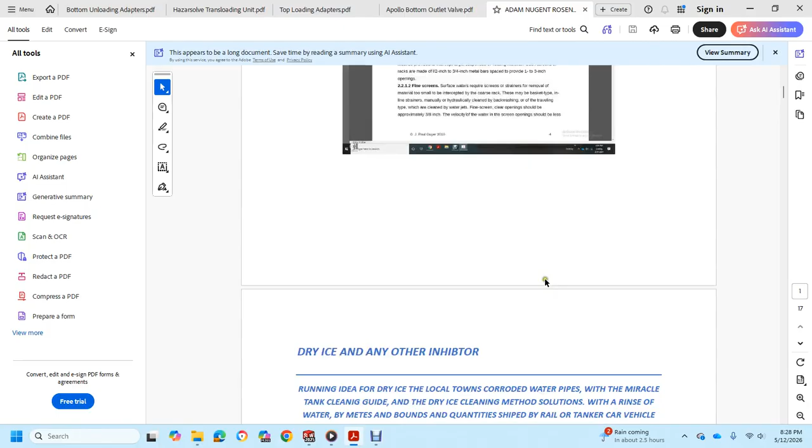Adam Nugent Rosenberger, October 21st, 2025.

Miracle Tank Cleaning Methods Information Repository for Advanced Tanker Cleaning Guide Cargo Handbook. It has an intro to water treatment PDF, dry ice and other inhibitors, running idea, water pipes, a miracle tank cleaning guide, dryers, cleaning method solutions with a rinse, rail and tanker car vehicle drinking problems, recovering sludge and product, solutions for a damaged pipe with watching customer, backflow meter housing, providing assistance with drinking water in town, allotting, and strategy, safety and health, and human integration system. Thank you, Adam Nugent Rosenberger, in the city of Dublin, United States.

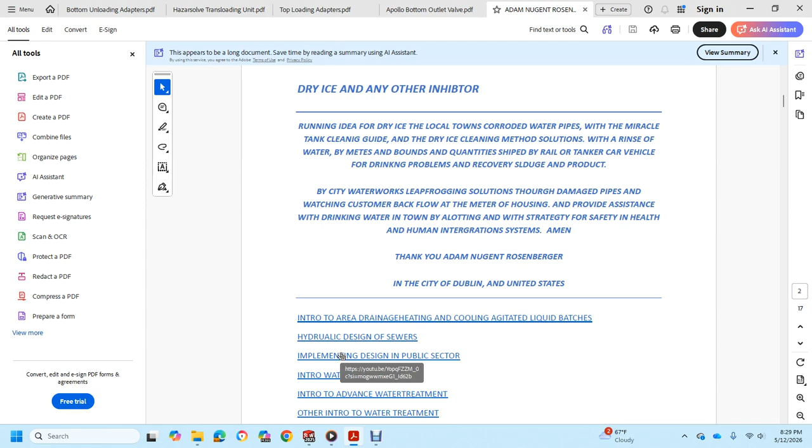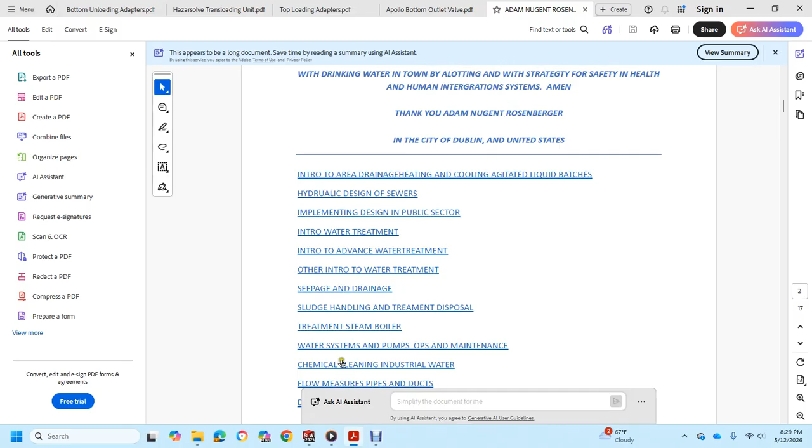We have several different resources - this is a suite that I made - covering area drainage, heating, cooling, agitated liquid batches, YouTube videos on hydraulic design of sewers, implementation design for the public sector, intro to water treatment, advanced water treatment, seepage and drainage, sludge handling treatment, treatment disposal, steam boilers, water system pipe operations, maintenance, chemical cleaning, industrial water flow, measuring pipes and ducts, and Department of Energy valves.

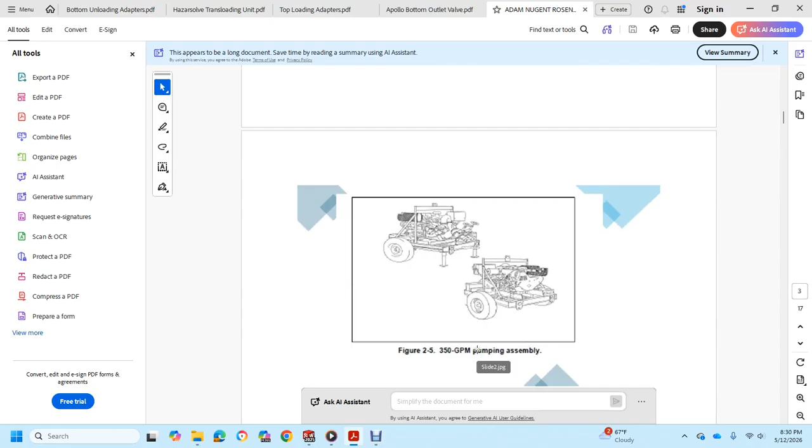We have a 350-GPM pumping assembly, a tanker car, and safety data sheets by Airgas USA, LLC.

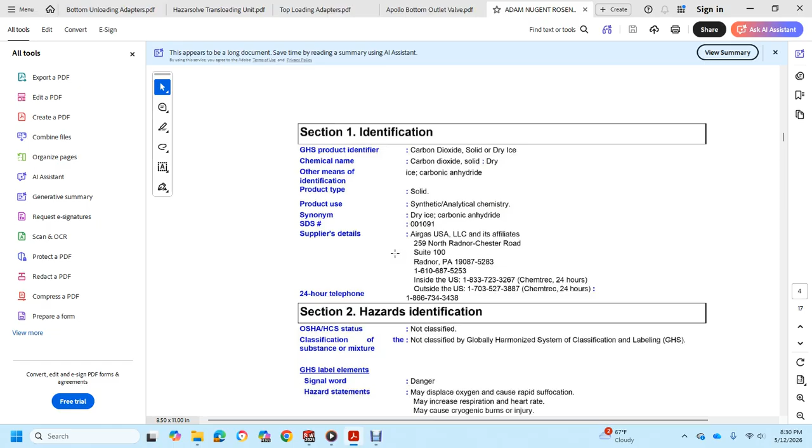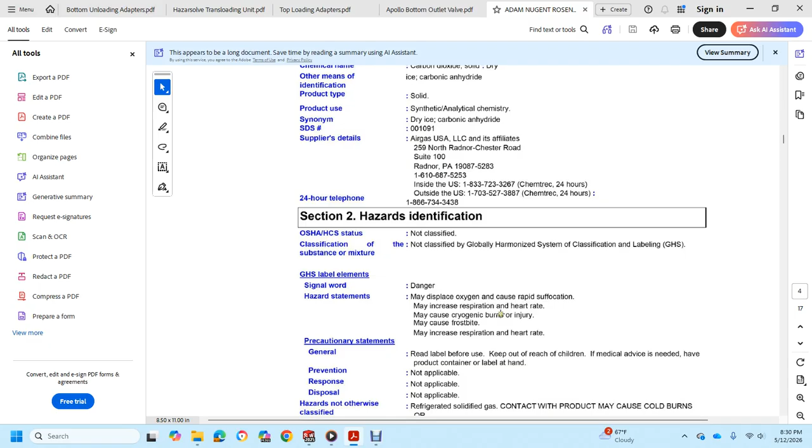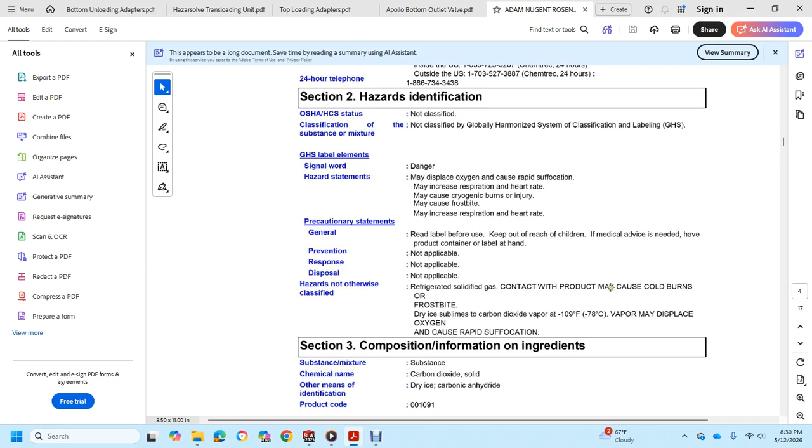We'll go into identification - carbon dioxide, solid dry ice, chemical name, GHS identification, product name, OSHA classification, globally harmonized signal word 'danger' - it may displace oxygen, cause rapid suffocation, increase respiration, heart rate, cryogenic burns, injury, and frostbite. Precaution statements for labeling: the refrigerated solid gas product may cause cold burns or frostbite. Composition is in section 3.

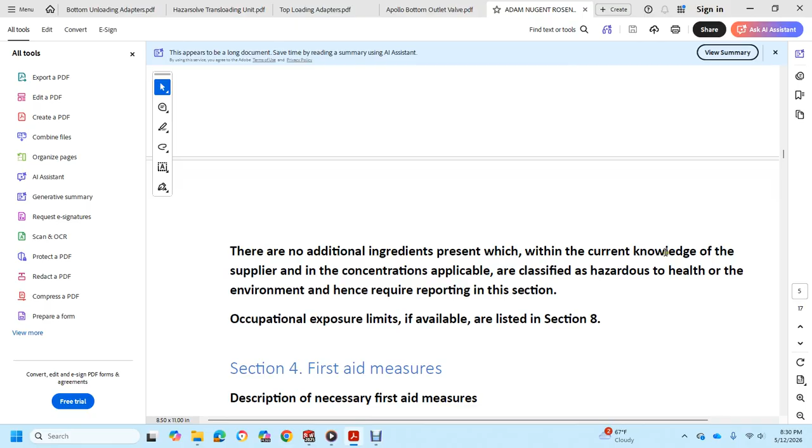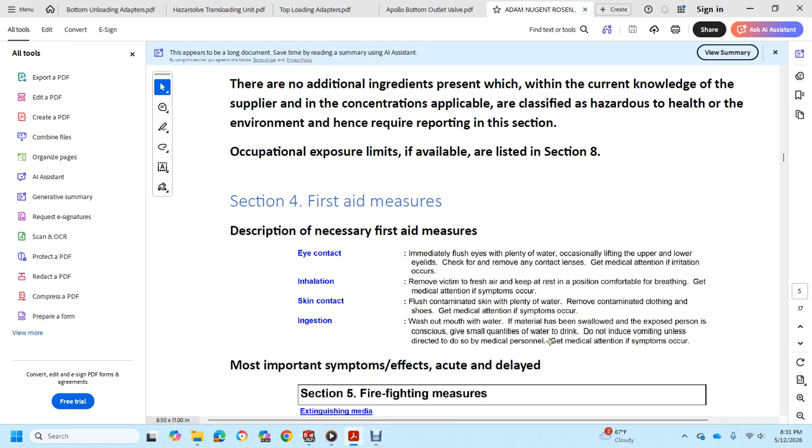The Miracle Tank Cleaning Guide lists ingredients presented with current supplier knowledge, applicable hazards, health and environmental information, and first aid measures. For ingestion: wash out mouth with water if the exposed person is conscious, have them drink quantities of water, do not induce vomiting, and seek medical direction - this covers firefighting as well.

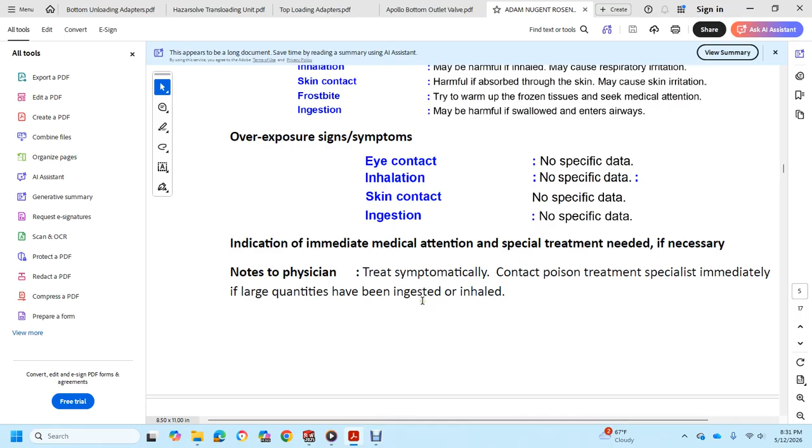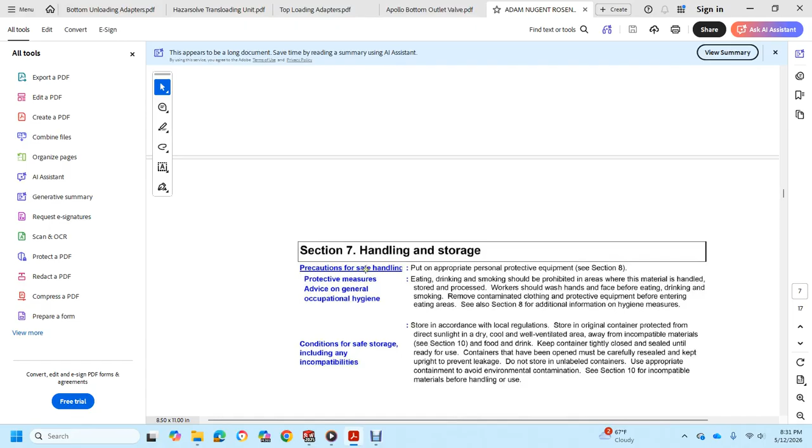There are some health warnings here, but dry ice is being used to clean metals. This covers medical attention, firefighting measures, precautions, cleanup methods for small and large spills, environmental precautions, safe handling, protection, and occupational hygiene.

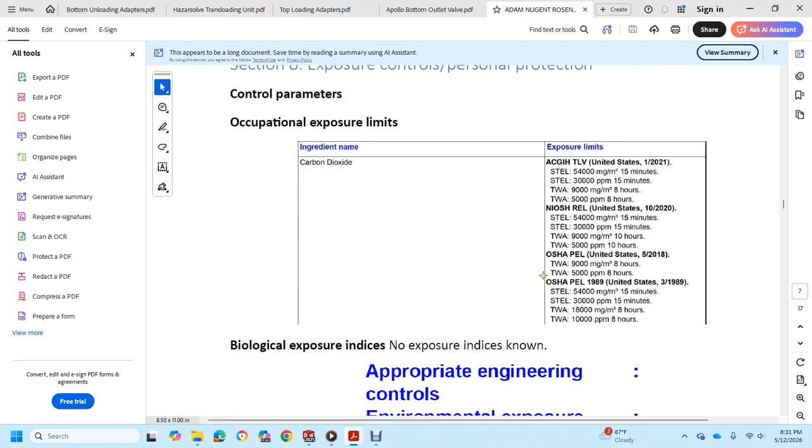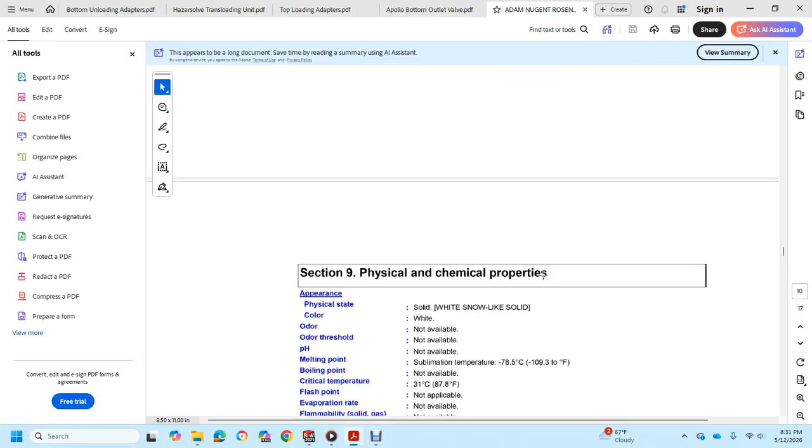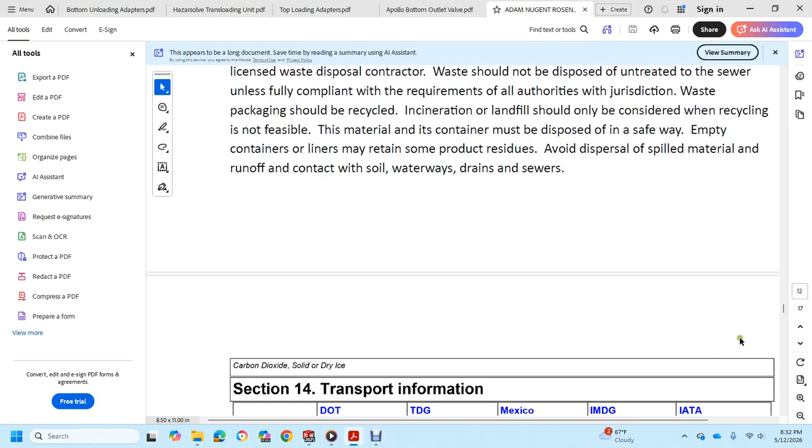Going through the Miracle Tank Cleaning guide's exposure control for personal - OSHA carbon dioxide ingredient names, emissions, respiratory protection, washing contaminated clothing before reusing, physical and chemical properties, stability, reactivity, toxicology information, and then transportation information. We have UN 1845 as the UN number, proper name carbon dioxide, transport hazard class, packing material, and environmental hazards.

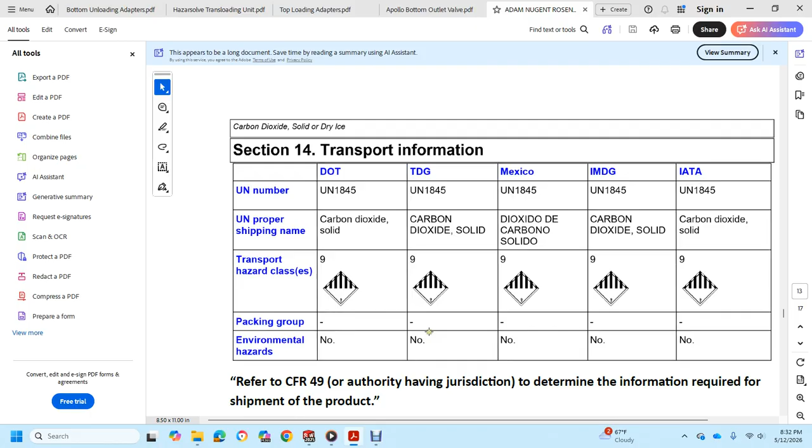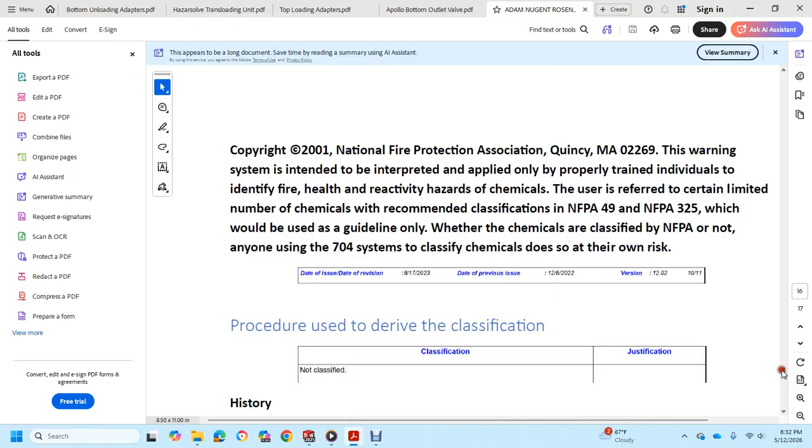Regulatory information - alright, so here's the deal, it shows different things. That's the Miracle Tank Cleaning Guide.

This brings up - okay, that's not that. Anyways, those are YouTube videos, and we'll take a look.

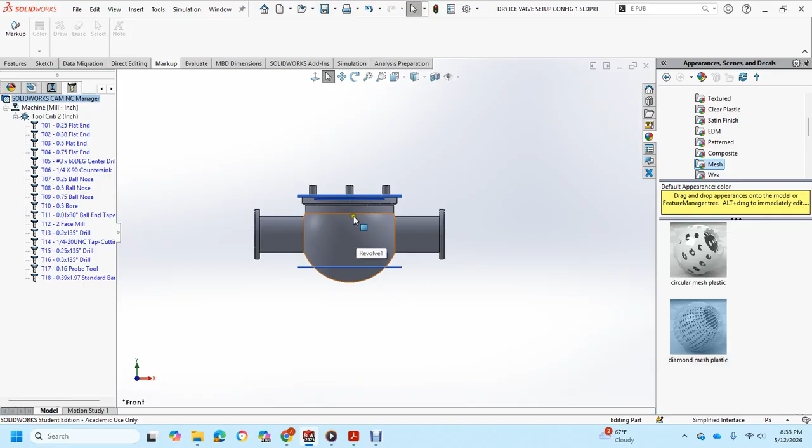Alright, we have SolidWorks. We basically have - on top we'll have a mega lug, and then we'll look at the drain. So here is an adapter.

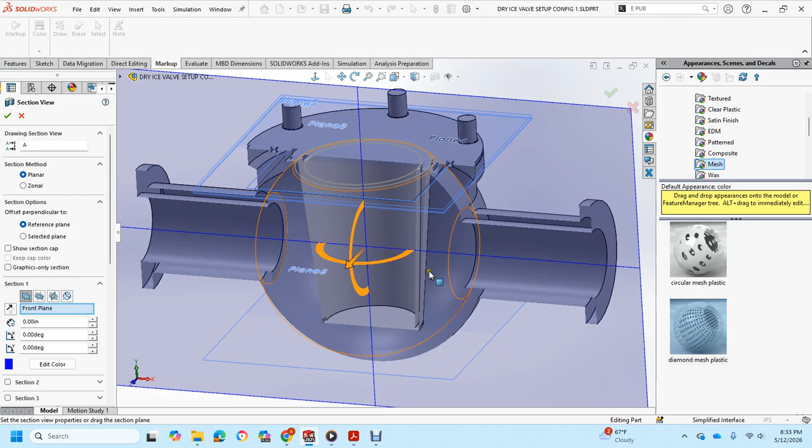In the middle there's a cone in front of the filter element, and that's porous, like over here in the circular mesh plastic. And then it rises from the top.

It starts at the bottom, goes to the top, comes around the top, and meets the lock - a nice little lock right there.

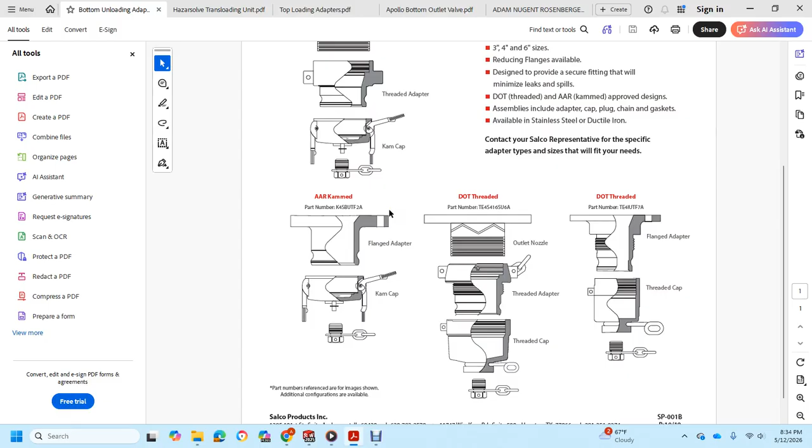The bolts are unthreaded. From here we take - let's go to the bottom outlet adapters. We add an adapter to the lid, and these are for tank cars.

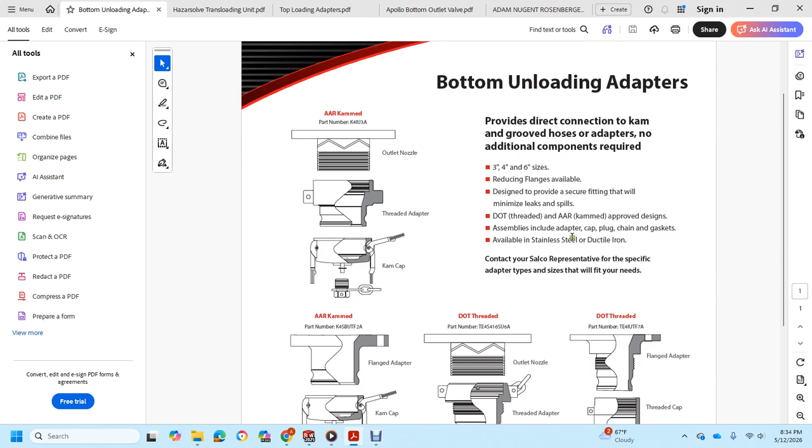We have the AAR Kammed part number K bottom unloading adapters, in 3, 4, and 6 inch, with reducing flange available. Designed for product security and fit, to minimize leaks, with DOT thread approval design, assembly including cap, plug and chain, and gasket available in stainless steel and ductile iron.

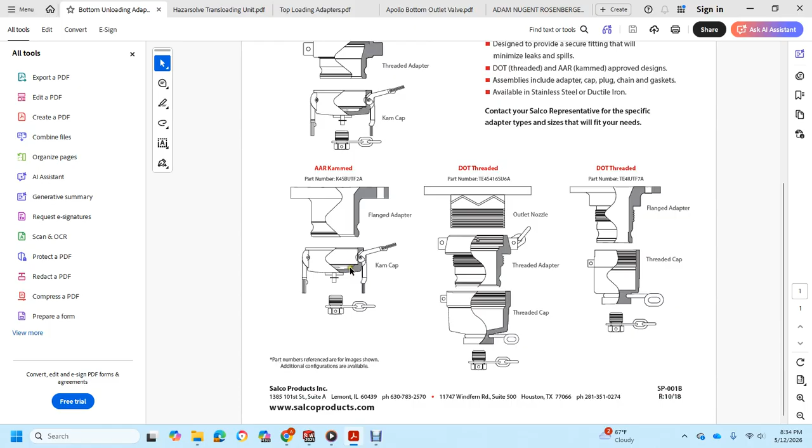So what we do is have a hole in the top of the mega lug plate on the filter, and then we add the threaded bottom unloading adapter.

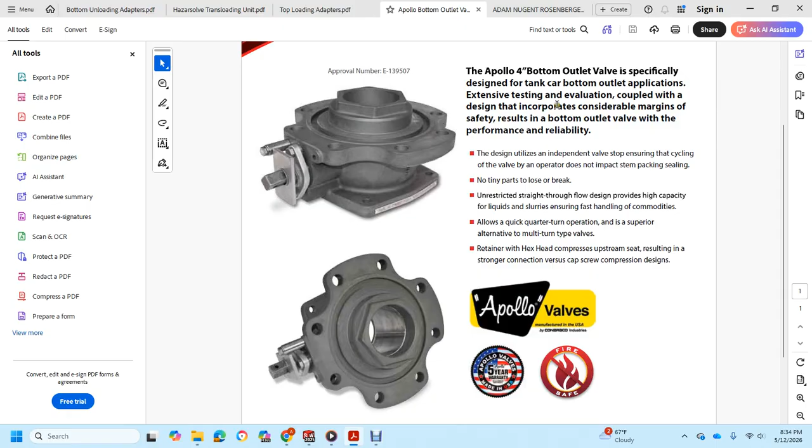We have the top loading adapter, and this one is a bottom outlet specification for tank bottom outlet cars. Here's another bottom outlet, and a top loading adapter.

Looking at the bottom outlet adapters, it would go right here in this circle. The bottom outlet adapter would plug right into the grid iron.

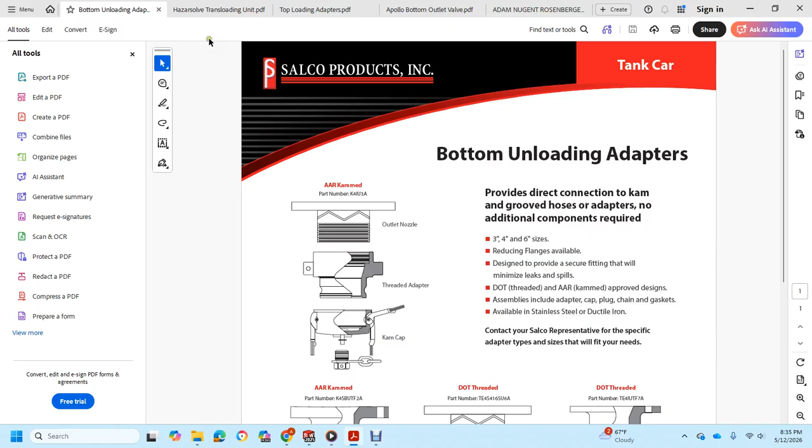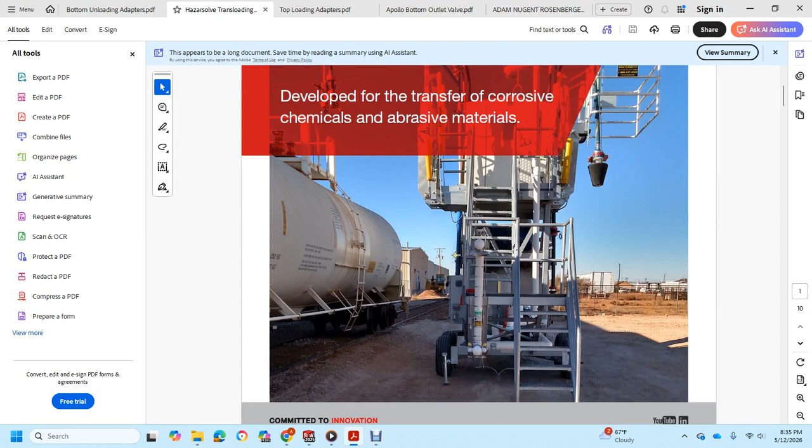We have a Hazarsolve transloading unit - these are Salco products. As we can see, it's wheel operated, developed to transfer corrosive chemical and abrasive materials. Overview of Hazarsolve - it's a trailer.

It has a transfer system with shutoff valves. An actuator protects against acid spill, product pump line suction, and an inlet basket strainer. So we looked at the pipe with a basket strainer, protecting the pump for debris and solids in the product.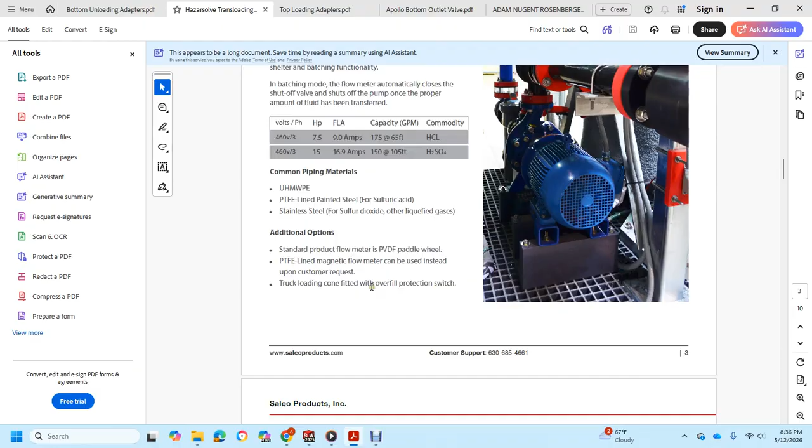We'd be using dry ice as the main chemical. Here would be the structure for shelter, showing the trailer with hoses off the side.

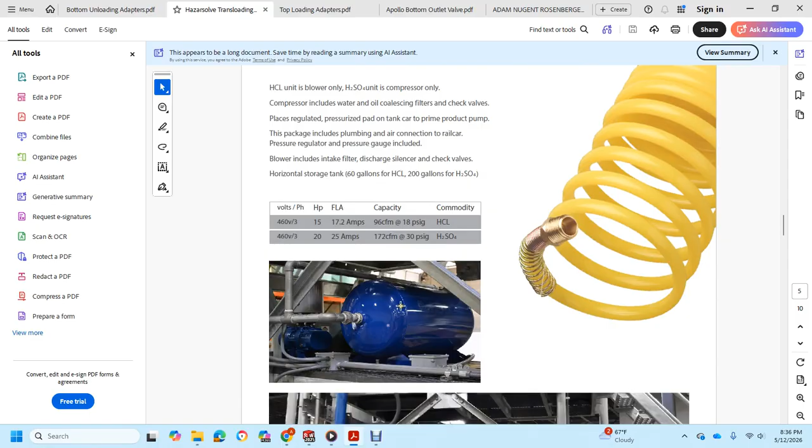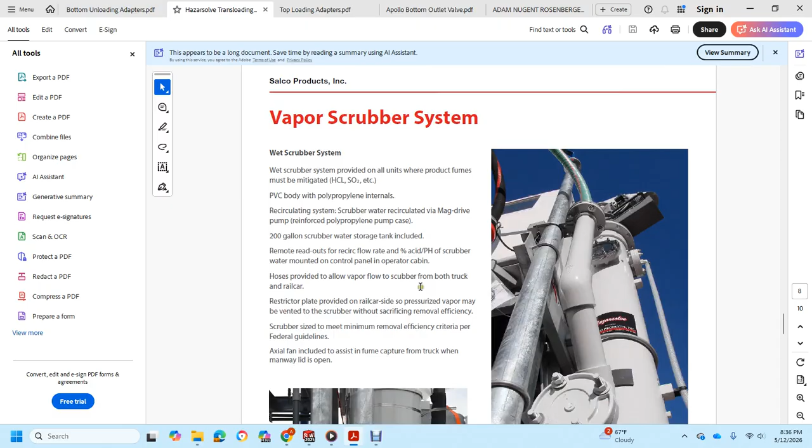Then it goes into a blower compressor - here's the blower compressor, and the compressor safety shower system in case you get it on yourself. A wash down system, horizontal storage tank, and a vapor scrubber system. Over here is the trailer.

This is Salco Products, committed to innovation. Corporate office, 1385 101st Street, Suite A, Lemont, Illinois, 60439.

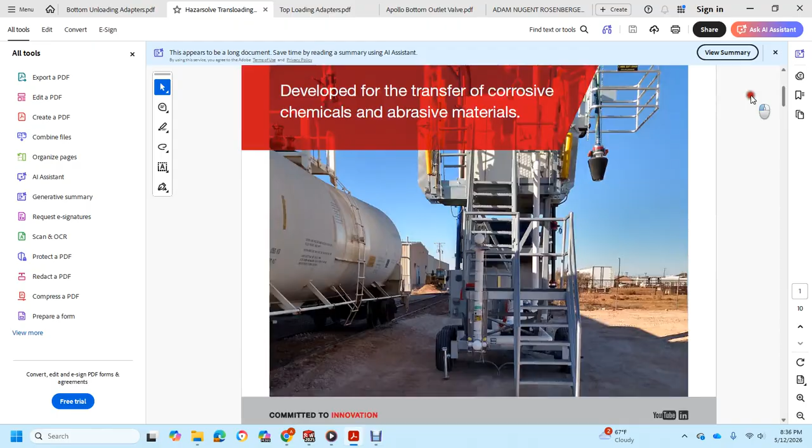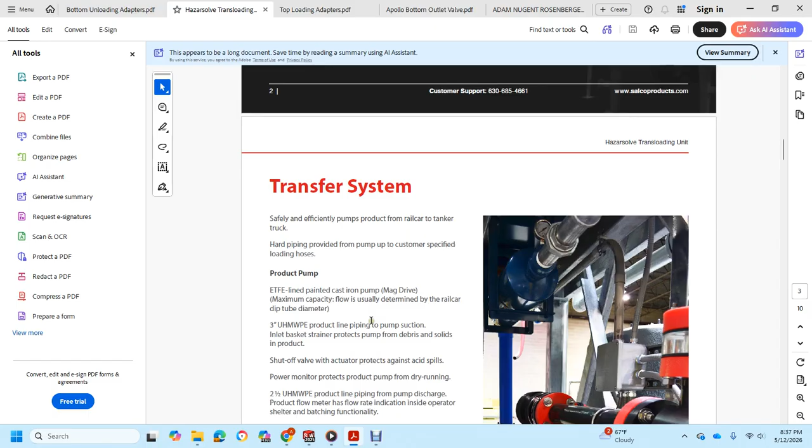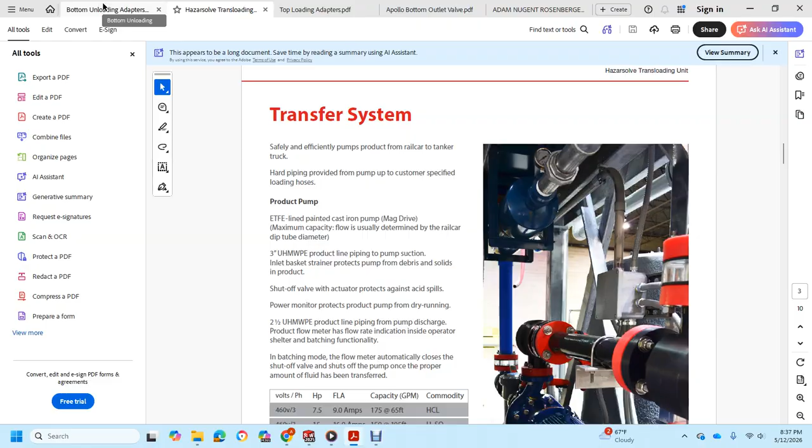So this is the idea: we take a strainer basket, split the pipe in half, put the bottom unload adapter, hook up the adapters, and use the Hazarsolve loading and transloading system. We have the top loading adapters, the bottom loading adapters, and the Miracle Tank Cleaning dry ice.

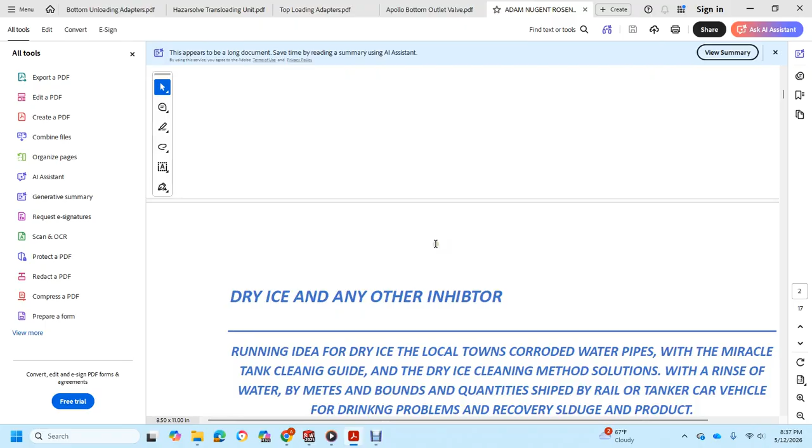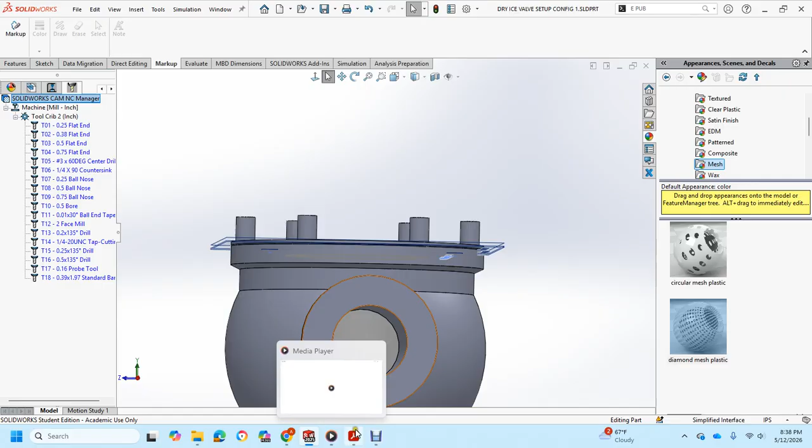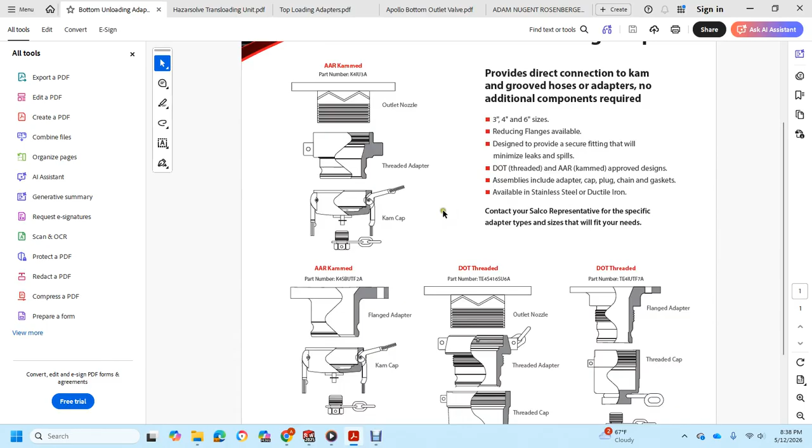I don't really draw water valves, but this is my best explanation. Thank you. So one more time: bottom outlet valve, bottom unloading valve hooked onto the strainer basket, and Salco products - if we need to weld it to the cover with a filter, we can.

There is a possibility to clean dirty pipes. Thank you.